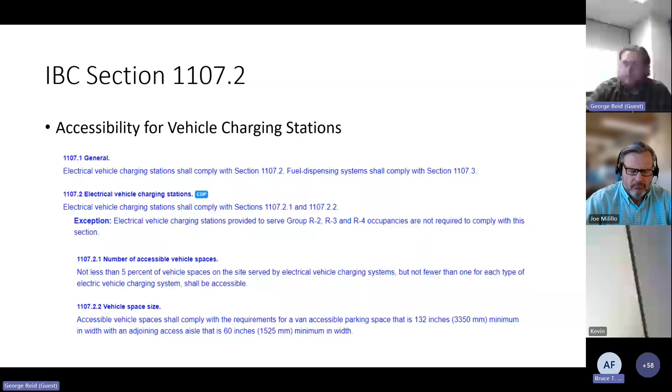All right, so dwelling units, sleeping units, we've had some changes, especially in our healthcare facilities, our I occupancy groups. The changes are we need to have them accessible. In condition 1, at least 4%. However, the new section says they need to be dispersed among various classes of units. So in our I occupancies, we need to take each type of unit, caregiving or facility, and disperse them. So in the different care units, depending on the level, we need to make sure each one is provided with an accessible unit.

And one thing that has been added, as per request from the healthcare industry, is our exceptions to the accessible units regarding the bathrooms themselves. So in our hospitals and care facilities, a lot of people need assistance in the bathroom. When you design an accessible restroom with the regular standard, the toilets and grab bars are arranged in a way that actually prohibits caregivers from helping patients in the restroom. So we now have a new section that addresses assisted toileting and assisted bathing, which is exceptions 1 and 2. We'll talk about that in a minute.

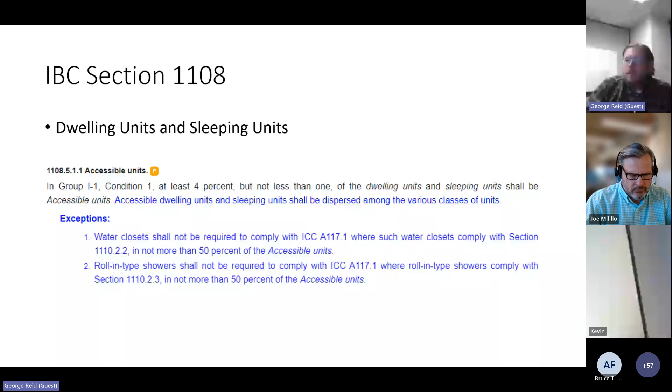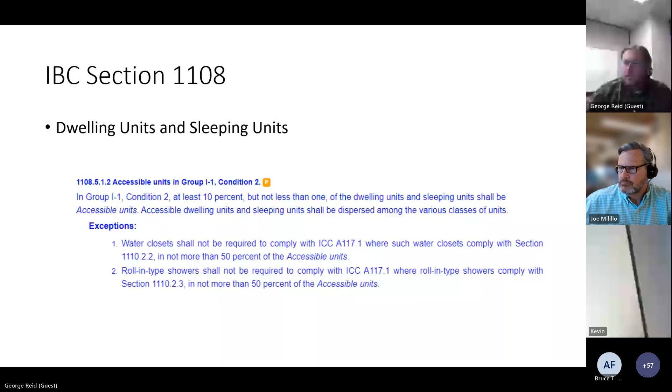So in our I1 condition 2, we need at least 10%, but not less than 1. Again, it is dispersed amongst the different various classes of units. And then also we have the exceptions for assisted toileting and bathing. The same also applies in our nursing homes. So our nursing homes are allowed to have the assisted toileting and bathing.

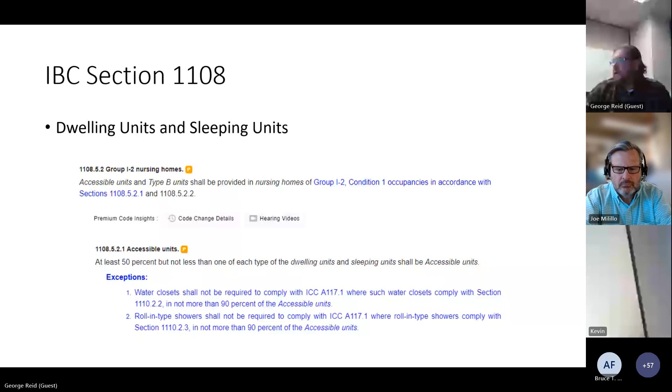It is important to note, just like the vehicle charging stations, it is not required. We're limited to the number that you can provide in the assisted toileting and bathing. They're not required, but you're limited to the amount that you can have. However, if you do choose to have those, they do need to meet the requirements set forth in 1110.2.2.

So in 1110.2.2, when we have assisted toileting and bathing, we're given a little extra width around the toilet to make sure caregivers can get in and assist a patient without having the toilet as close to the wall as it normally is required. So the center line of the toilet in these assisted toileting facilities shall not be less than 24 inches and not greater than 26 inches. A little extra clearance there to get an able-bodied person around to assist a person that needs help.

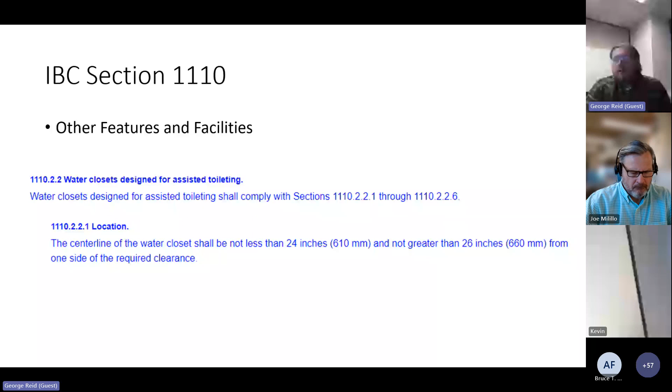The clearance around the water closet, we need to have not less than 66 inches. So we have a little more clearance that's required. And then our clearance depth is extended out to 78 inches. So it's a bigger clearance space, again, intended for caregivers to aid a patient. We are still allowed to have the overlaps of clearances as per ICC-A117.1-2017, but we still can't have the fixtures within those clearance spaces.

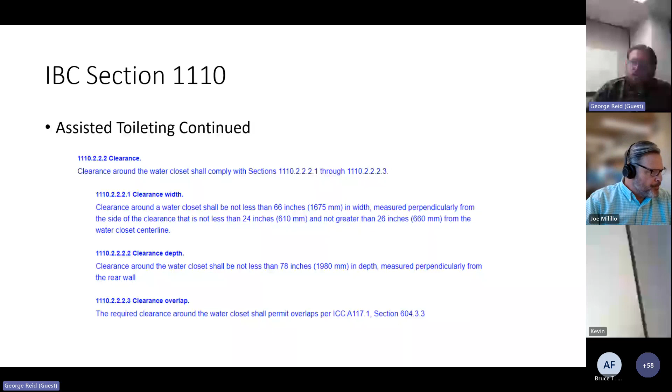Our heights and whatnot are consistent with others as far as the toilets are concerned, but we do have a requirement for swing-up grab bars. Again, when I was laid up with my leg in a straight leg brace, swing-up grab bars are a wonderful thing. When you have those, it really helps you stand up. So these assisted toileting spaces do have a requirement for swing-up grab bars. They need to be not less than 14 inches, not greater than 16 inches away from the center line. The length of the grab bar is 36 inches measured from the rear wall, with the top position of 30 inches - not less than 30, not more than 34. The intent is those swing-up grab bars can help somebody get themselves up off that toilet.

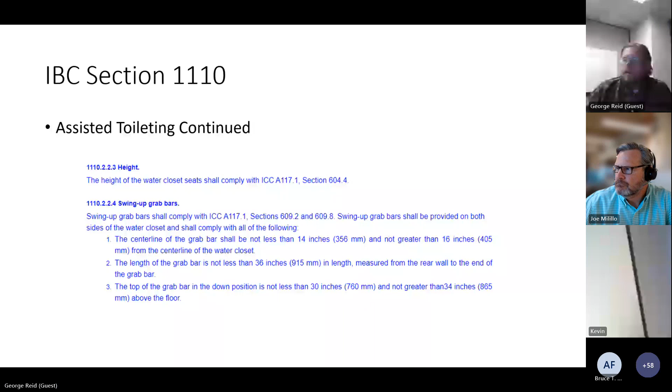Flush controls are the same. They do need to be on the clear floor space side. And then the dispensers and whatnot shall be not less than 24 inches, not greater than 36 inches away from the wall.

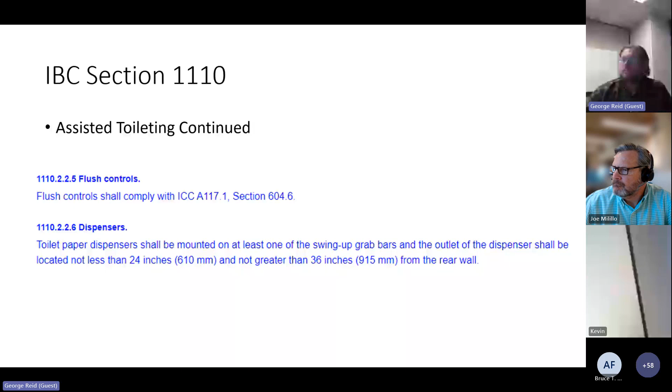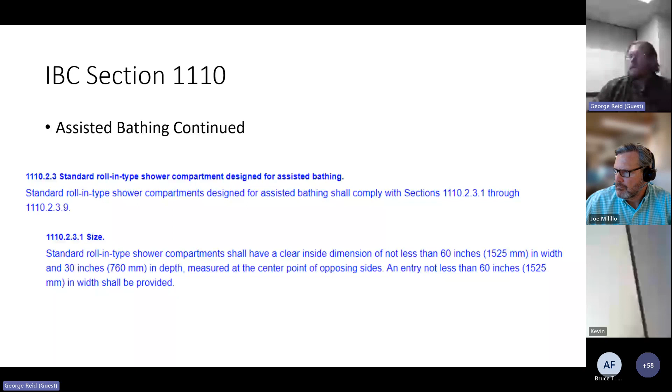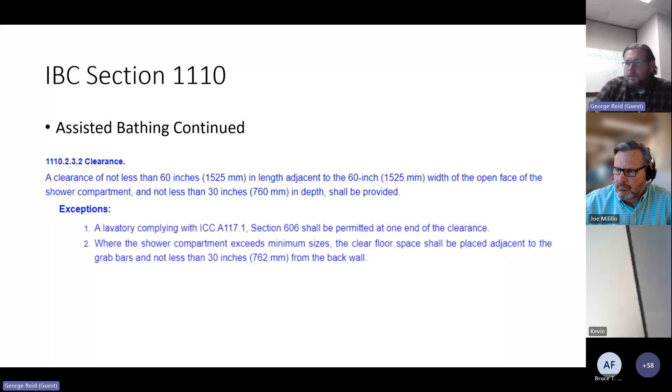Exceptions: a lavatory complying with 606 shall be permitted to be at one end of the clearance, and where the shower compartment exceeds minimum sizes, the clear floor space shall be adjacent to the grab bars, not less than 30 inches from the back wall.

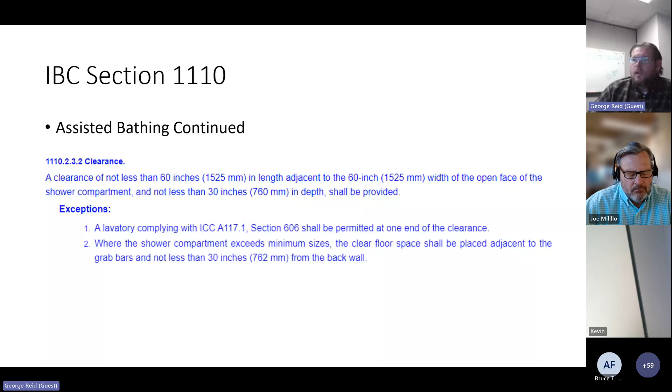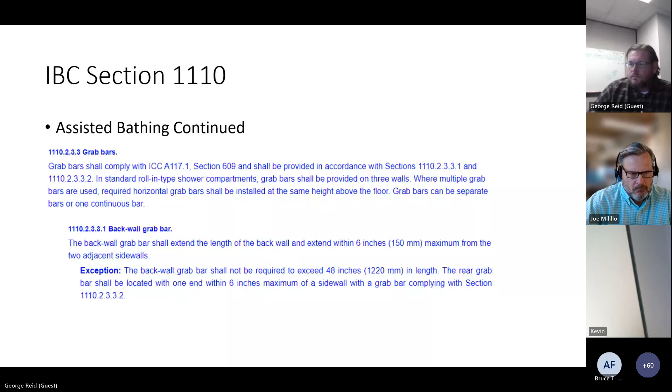We do have to have grab bars. The back wall shall extend to the length of the wall and extend within 6 inches maximum from the 2 adjacent side walls. Our sidewall grab bars shall extend the length of the wall and extend within 6 inches of the adjacent back wall.

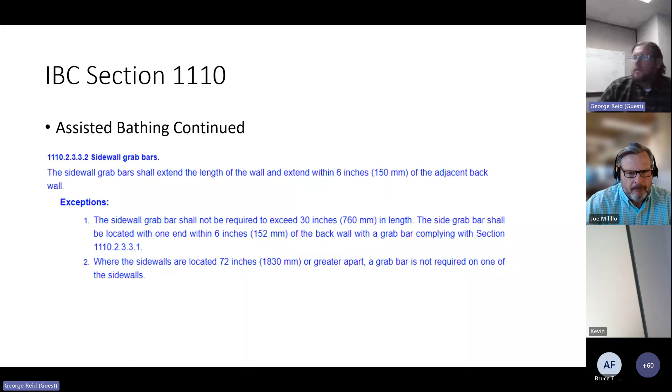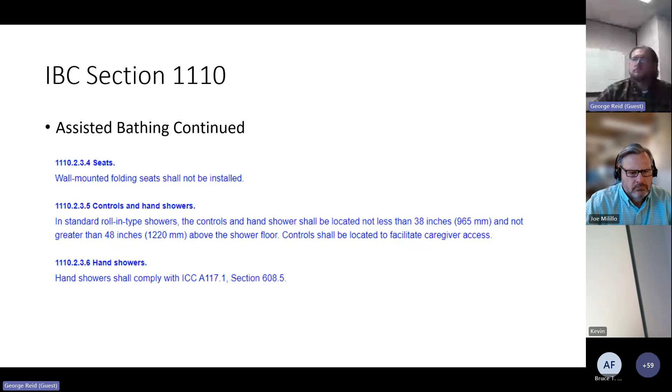Thresholds are the same as a typical shower, and these sections are very similar to, or are the same as, a typical shower compartment.

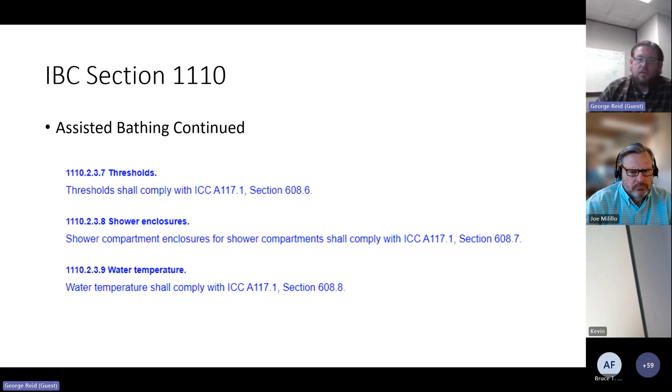One new requirement is our family or assisted use toilet rooms are now required to have an indicator indicating that the room is occupied or vacant. A lot of the locks and whatnot have those integral, but I just make sure when you're speccing those out that on your family or assisted use toilet and bathing facilities, we do have an indicator on those doors.

Water bottle filling stations have become very popular. It is now required to make those accessible. Bottle filling stations over drinking fountains for standing persons are not required to be accessible, provided that bottle filling stations are also located over the drinking fountains for persons using wheelchairs. So if it's on the high water fountain, we also need to provide one on the low. Keep that in mind when you're installing these bottle filling stations.

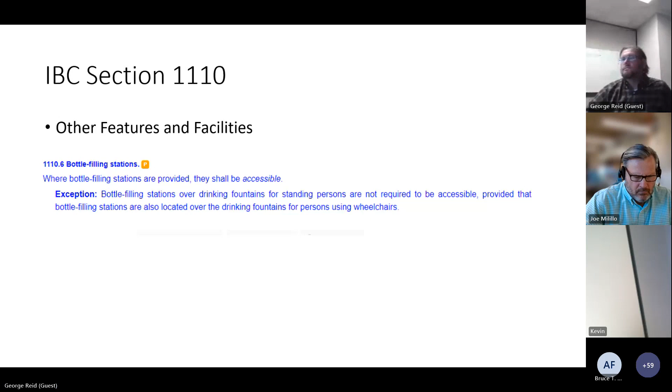Sales and service counters. Not much change to this code section. However, they did add windows. Before it was just sales and service counters, but it is now incorporated windows. So if you have a sales or service window, those do need to meet the requirements for accessibility. So our reach ranges and whatnot, and our approaches, clear floor space, those do apply, even if no countertop is provided.

In our recreational facilities, again, this section hasn't changed much other than cold baths have been included. So swimming pools, wading pools, cold baths, hot tubs, and spas all need to be on an accessible route. Really the only change here is cold baths have been added to that section.

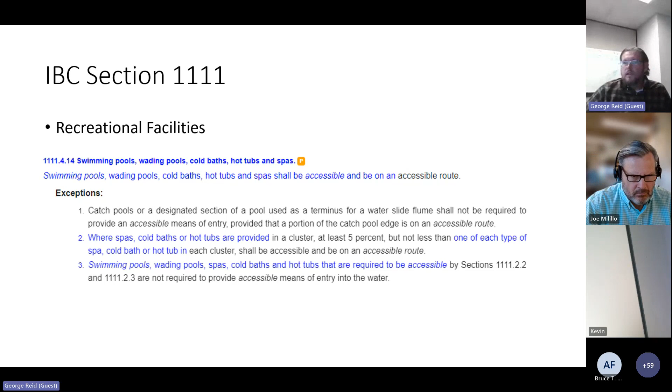Signs required by 403.4 of the International Plumbing Code, identifying toilet rooms and bathing rooms, shall be visual characters, raised characters, and Braille complying with ICC A117.1. Where pictograms are provided as designations for toilet rooms and bathing rooms, the pictograms shall have visual characters, raised characters, and Braille. So on our toilet rooms, we do need to have the Braille indicators, and it needs to meet the specifications as found in ICC A117.

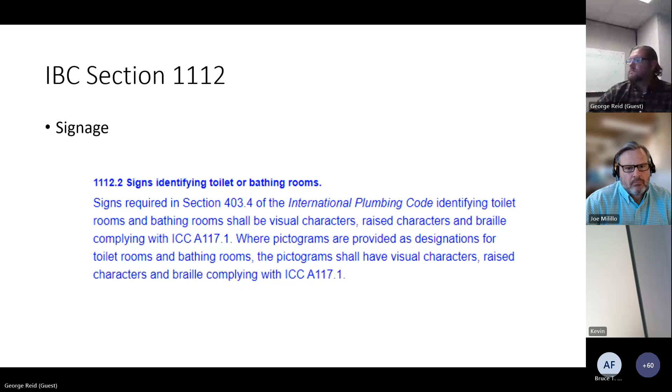So that's the majority of the changes to Chapter 11 in the IBC. Now, Chapter 11 in the IBC does say that buildings and facilities shall be designed and constructed to be accessible in accordance with this code and ICC A117. So that's our charging language.

If we go to our reference standards in Chapter 35 of the IBC, you'll see ICC A117-17, indicating that the now adopted accessibility standard for the state of Utah is the 2017 ICC A117. Just a quick note, in 2009 it was the ANSI A117, but now the International Code Council, or ICC, controls that standard and publishes it. So they've removed the ANSI portion of that. So when you're talking about the 17 version, it's the ICC A117, not the ANSI A117.

Before I get into the significant changes to the 2017, which there are quite a few, we're just going to cover some of the major ones and highlights. When you're designing the accessibility portions of your project, make sure to go into that link I showed earlier, look at the specific installations you have and the chapters within ICC A117. Make sure there aren't any changes that'll surprise you, because there are a fair number of changes. We're just going to cover some of the key ones. I do want you to pay attention for the rest of this presentation.

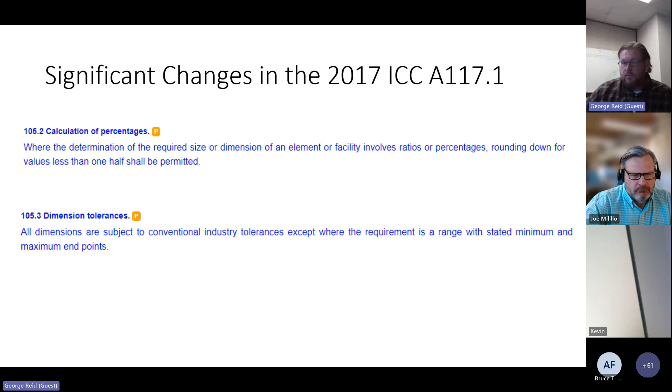This now allows you to round down, which hadn't been codified previously. Also, dimension tolerances: all dimensions are subject to conventional industry tolerances, except where the requirement is a range with stated minimum and maximum endpoints. This is important when considering our shower stalls and whatnot, where we have a 60-inch requirement. This now especially gives our inspectors some leeway to say it's acceptable because it's within industry tolerances. As you all know, it's really hard to try to rough frame a shower stall at the backer board, grout and tile and hit it exactly at 5 feet. So there's some leeway there. However, it doesn't apply if there's a minimum and maximum standard. If it's given a range, it does need to be within that range. We can't say 48.5 is okay if 48 is our max.

All right, so one of the biggest changes in the 2017 is our turning spaces. Turning spaces have now been broken up between new buildings and facilities and existing buildings and facilities. Throughout the 2017 A117, you're going to find sections that say new buildings, existing buildings. There's almost two standards there versus new and existing. Now, it doesn't define what an existing building is. So when you're doing, say, a tenant improvement in a shell building, it would definitely be a good idea to reach out to your AHJ and make sure if they're considering it a new build or an existing build.

If all else fails, the safe thing to do is just design it as a new building. But if it's an existing building, there are different standards you can follow. Obviously you can still provide the requirements for a new building, but in an existing, if you're having a hard time making the dimensions and clearances work, you're given a little leeway. So in a new building, we now have a 67-inch turning radius. Now, our 67 turning radius can include some knee and toe clearance, however that has been restricted. You can now only have 10 inches maximum of knee and toe clearance counted in your turning radius.

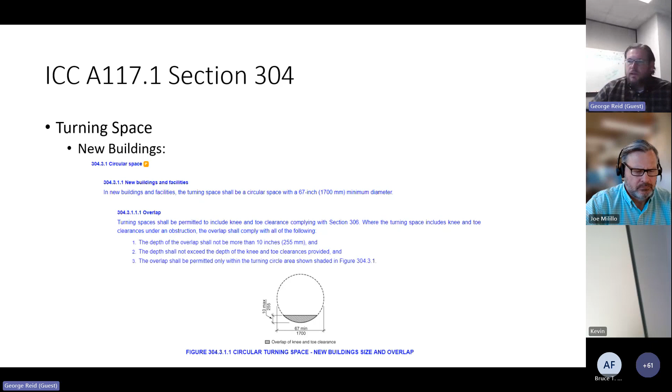For existing buildings, we're still allowed to have a 60-inch turning radius. However, the knee and toe clearance has changed as well. We can now only have a 25-inch maximum knee and toe clearance overlap, and that's only on the stated section, so it can't be around the entire turning radius. It's only on 25 inches of that turning radius.

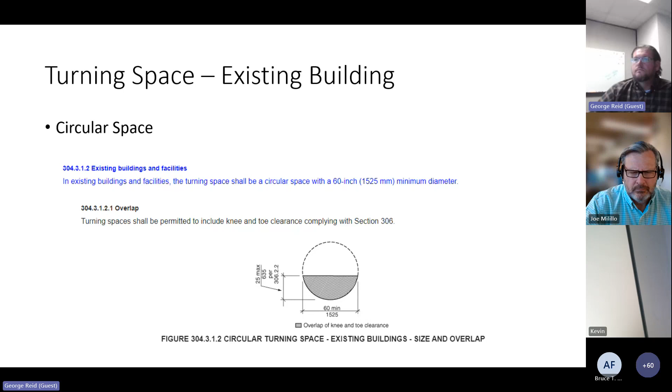For our new buildings, for our T-shaped turning space, we now have 3 options. They've all been increased, but you have different options to see which one best fits your space. Option 1 is a 68 by 60 T space, but we can chamfer off the corners with an 8-inch chamfer. The arms are 16-inch minimum on each side with a 24-inch leg.

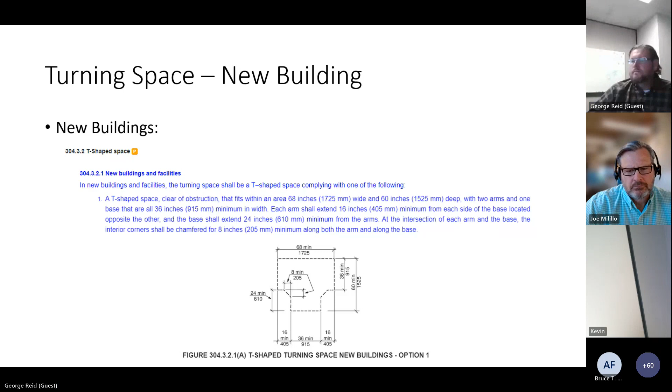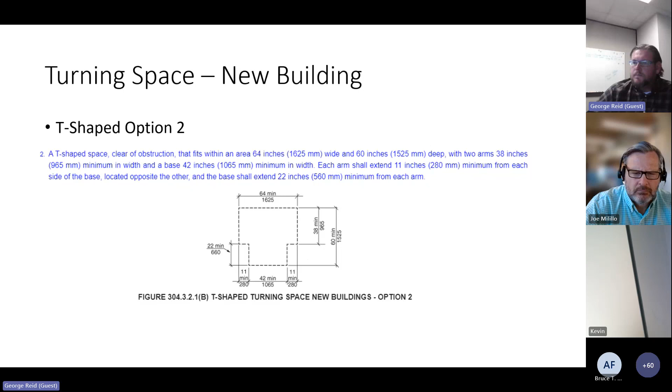Option 2 is our typical turning radius, just a little bigger. It's 64 inches in width, 60 in depth, with 38-inch arms and 42 leg with 11-inch indent. Option 3 is just a slight variation of that, where it's 64 by 60, with 40-inch minimum leg width there, and arm.

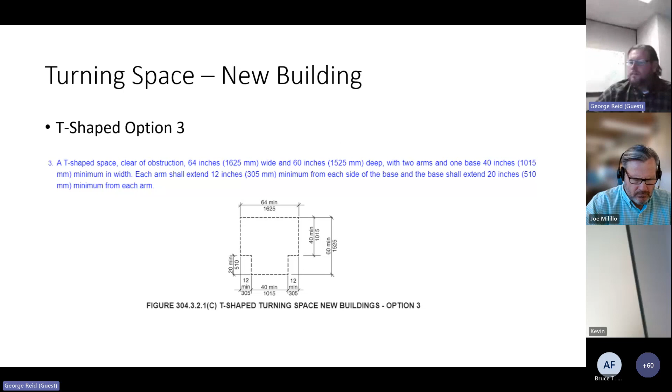On our overlaps, for the knee and toe clearance, you can only use the overlap for the base and one arm.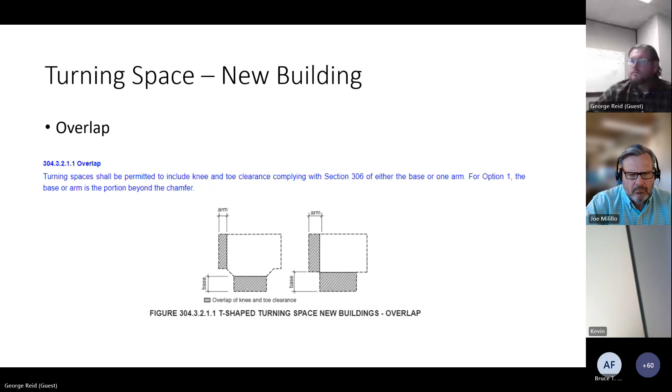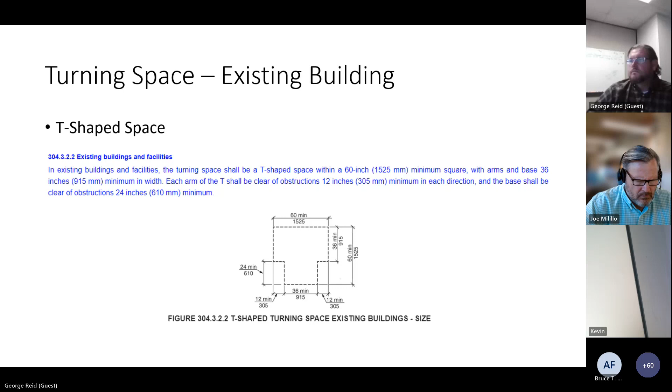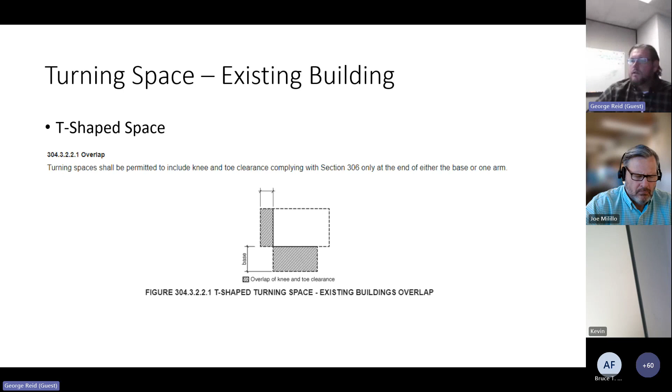For our T-shaped turning space in existing buildings, it's pretty much the same, 60-inch by 60-inch with 36-inch base and arms. There again, your overlap can include one arm or the base.

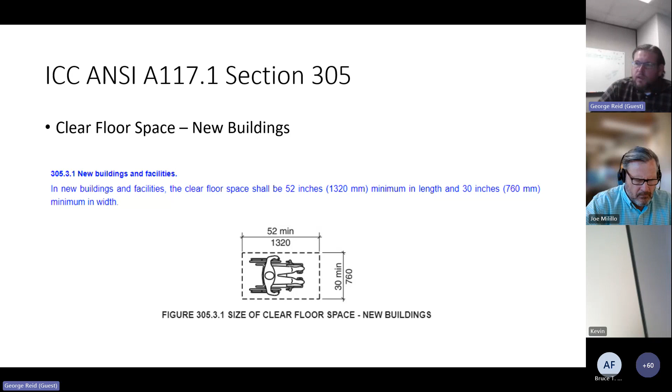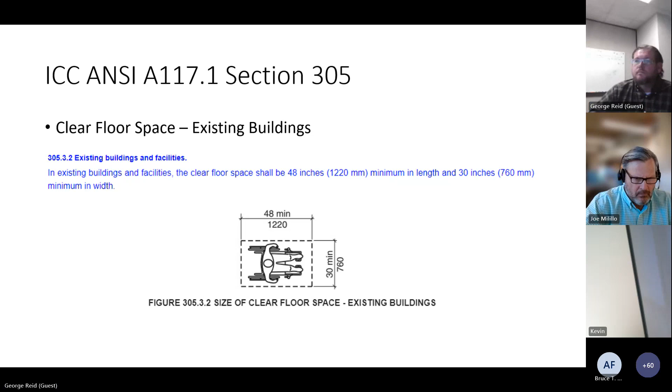Clear floor spaces for new buildings and facilities has now been increased again due to motorized wheelchairs. They're a little bigger, so everything's kind of been upsized, especially when it comes to new buildings and facilities. Our new clear floor space in a new building is 52-inch minimum, 30-inch in depth. For existing buildings, we now have 48-inch minimum in length, 30 inches minimum in depth. Reach ranges hasn't changed much, except for, as we talked earlier, fuel dispensing apparatuses do need to be accessible.

We are given a little bit of leeway on those fuel dispensing devices, in that you are allowed to have a 54-inch maximum reach range above the floor. So it gives you just a little extra room there to try to make those work if you're designing a Maverick or whatnot.

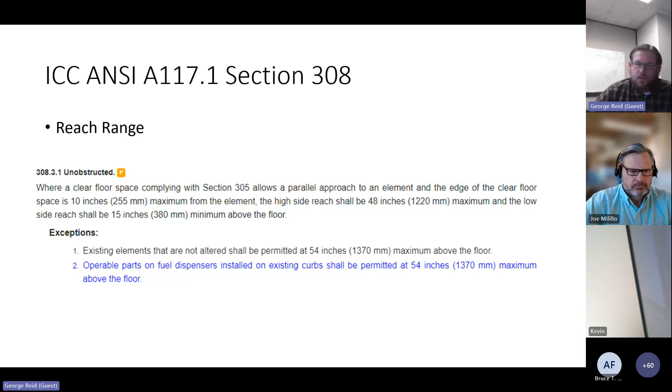For operable parts, previously the code said that operable parts required by ANSI A117 must meet the reach ranges and be accessible. However, this section has now changed to where it just flat out says operable parts must meet the reach ranges except for the items listed below.

So our receptacles serving a dedicated use where 2 or more receptacles are provided in a kitchen, and on down the list. So our floor receptacles and whatnot do not need to be accessible, but just take a look at that list when you're designing and make sure that if you have operable parts, they're either on this list or they're meeting the accessibility reach range requirements.

For accessible routes, those have been increased. So an interior accessible route is 36 inches. However, for an exterior accessible route, it's now been changed to 48 inches.

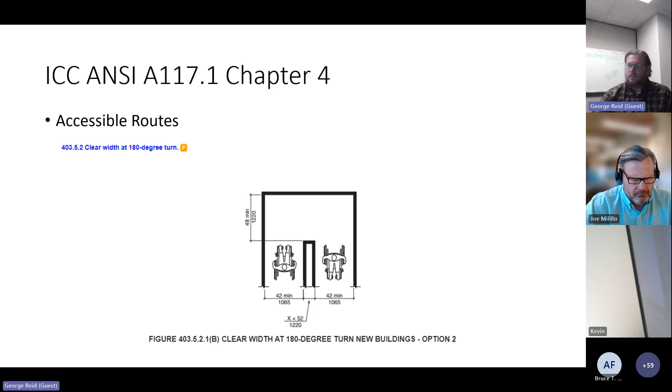Same thing with our option 2, looks very much the same, except 48 has been changed to 52. Then we also have a third option where you're allowed to reduce down to 43 inches, but you do need to provide 43 inches on your path leading up to the turn and going away from the turn.

For existing buildings, those have not changed for our 180-degree turn. So these look the same as they did previously. So if you're doing an existing building, you had a 180-degree turn, it should still be compliant.

We do have a new section now for our clear width at a 90-degree turn. So our 90-degree turns, you do have options.

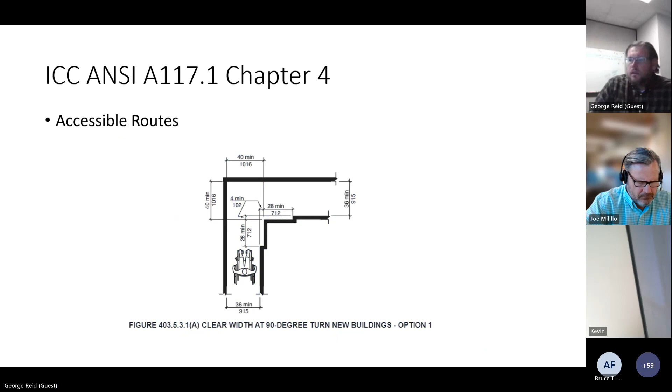Option 1: you're allowed a 36-inch minimum aisleway, but at our turn we have to have 40 inches with a 28-inch offset at the turn, and then your exiting area there is 36 inches as well.

Option 2 is an 8-inch chamfer, so you can have a 36-inch approach and exit, but an 8-inch chamfer, and that will satisfy a 90-degree turn.

Option 3 is a 38-inch minimum aisle leading up to the turn and 42-inch going away, or vice versa. Keep those in mind when you have your 90-degree turns. Oh, and I believe we do have one more option: 36-inch aisle and 44. Keep those in mind when you have your 90-degree turns.

Again, those are for new buildings. For your turns in existing buildings, it's just your typical 36-inch by 36-inch. So keep that in mind, new versus existing. We do have some new requirements that we need to address on those 90-degree turns.

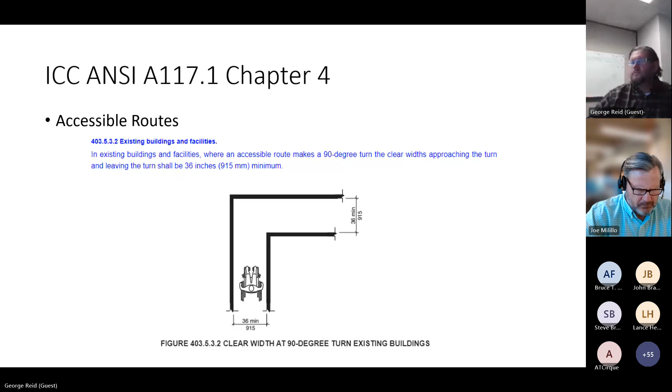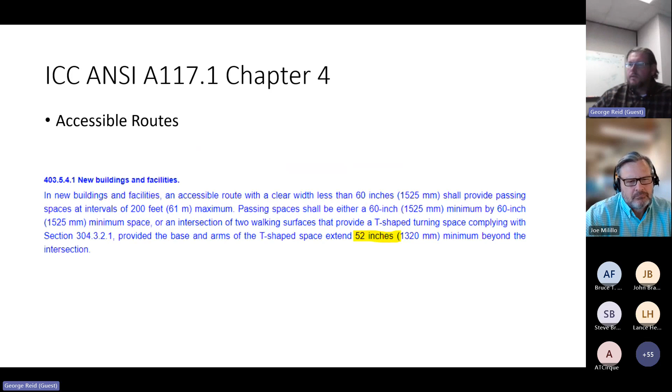We've had some changes to our accessible routes. This looks very similar. Really, the only change here is being consistent with our T-shaped turning space. It needs to extend 52 inches beyond the intersection.

You can see here this dimension for our one leg has been changed to 52 inches. Passing spaces, we do need to have those every 200 feet, and they do need to be 60 inches in depth, 60 inches in width, not less than 36 inches for the aisle.

So for existing buildings, they pretty much look the same as they did in the 2009. We need to have our passing spaces every 200 feet. You can do it with either an alcove or you can do the T-turn option.